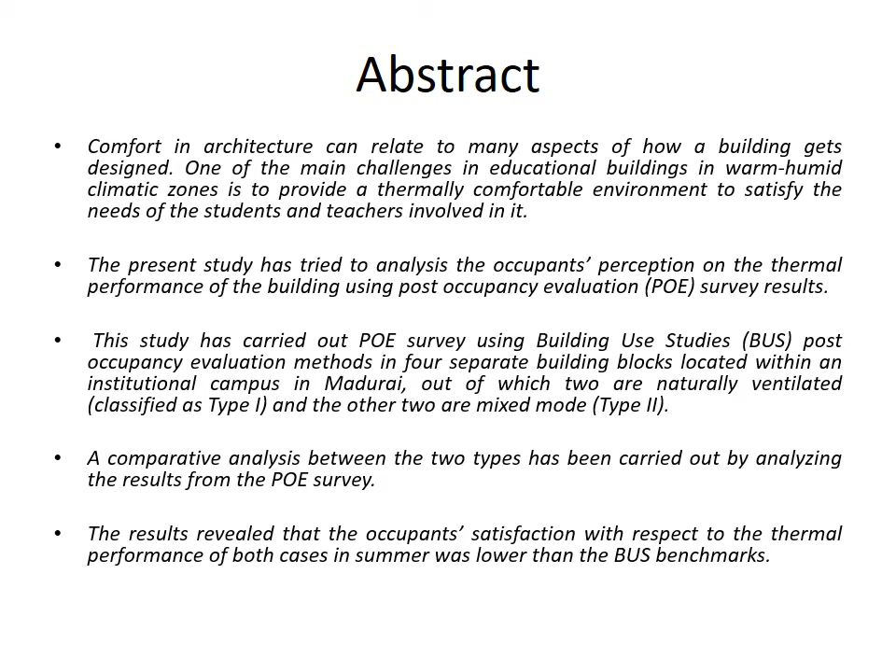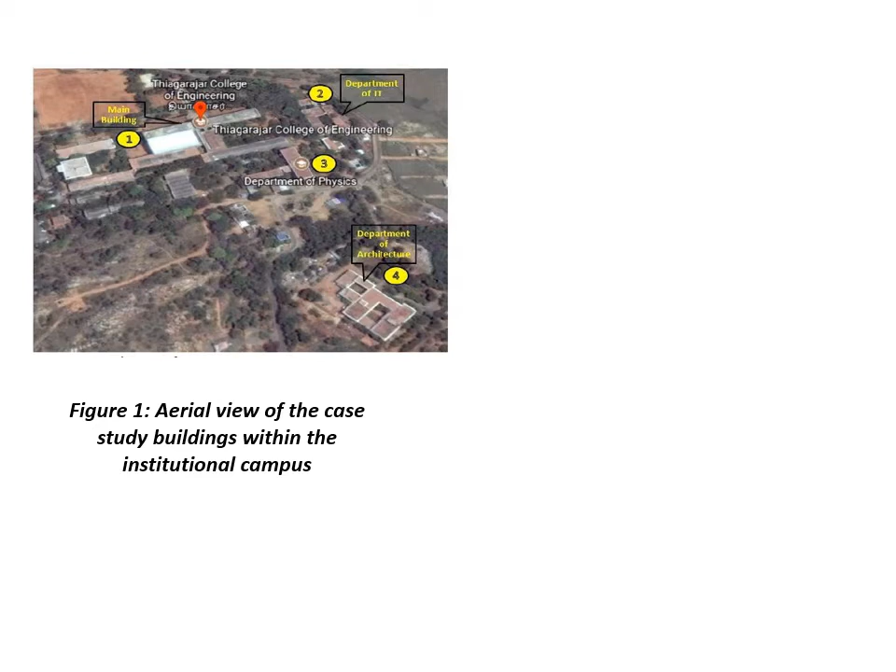The BUS survey methodology. A total of 600 surveys, 150 to each block, were distributed, but only 210 occupants responded back, 110 from type 1 blocks and 100 from type 2 blocks in the year 2016. The respondents were faculty members and undergraduate students of age group 18 to 55, 40% male and 60% females.

Figure 3 represents the results of one of the variables derived from the BUS questionnaire survey. The benchmarks are denoted by 3 vertical lines on the top scale, and the scale midpoint is denoted by 3 vertical lines at the bottom scale of each variable.

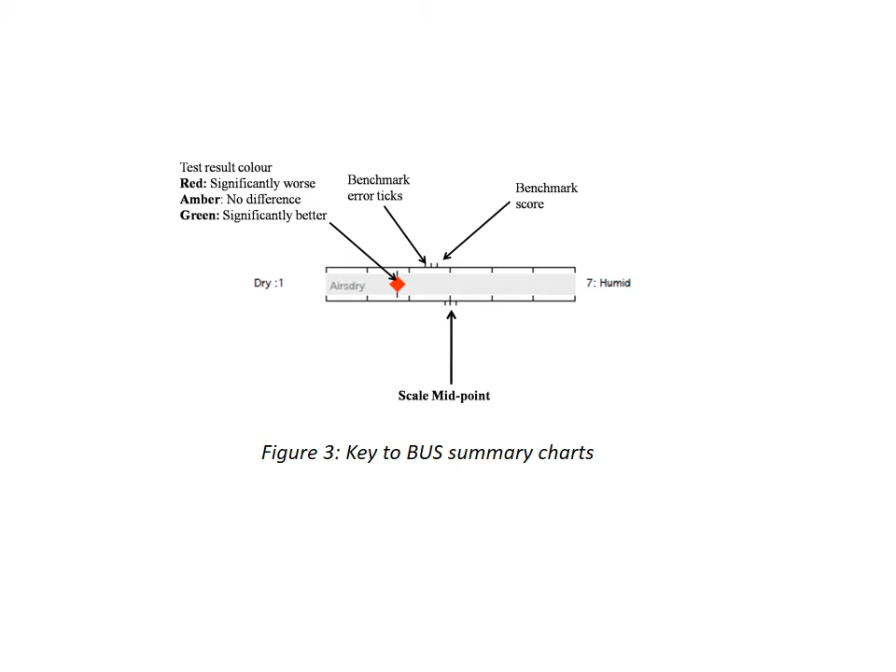The test results are denoted by 3 colors, the green, amber and the red, where green squares show the mean values are higher than the benchmark and scale midpoint and hence in good agreement. The amber circles represent no difference and the red diamonds show a poor score.

Figures 4 and 5 represent a summary of the overall performance ratings of the 12 variables surveyed using the BUS questionnaire survey in type 1 and type 2 buildings respectively. From the results, it is evident that the variables with mean scores higher than the benchmark levels are denoted by green squares, showing that the occupants feel significantly better. The amber circles are closer to the benchmark and slightly higher than the scale midpoint, representing no difference in the occupant sensation. The red diamonds denote significantly worse sensations.

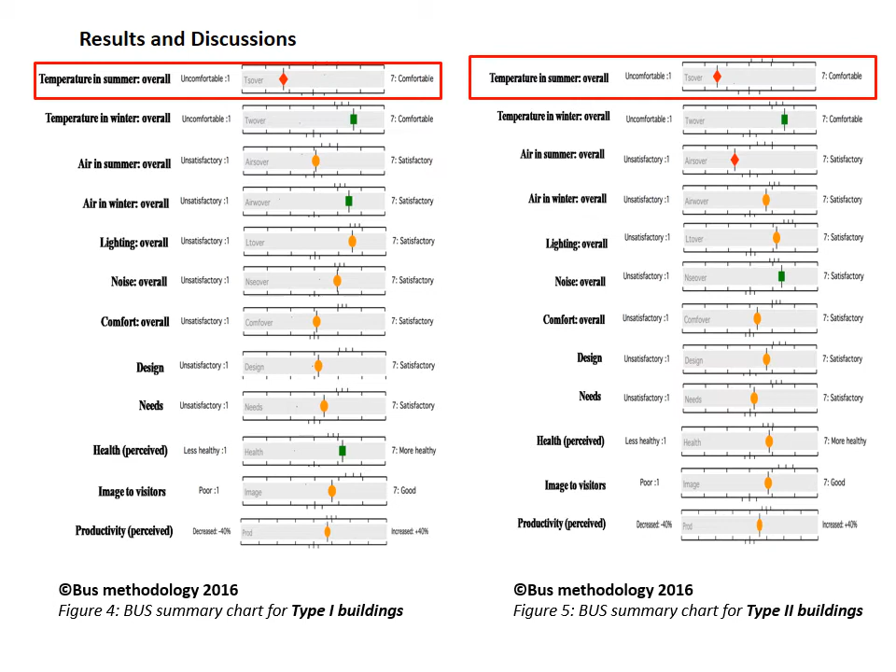In both type 1 and type 2 case study buildings, it is observed that the overall temperature in summer was significantly worse and marked by red diamonds. In type 2 buildings, it was observed that the overall air in summer was also lower than the benchmarks and the midpoint limits.

Figures 6a and 6b show the BUS scores for temperature overall and air overall in summer for type 1 and type 2 buildings. It is noted that 68% of the occupants were dissatisfied with the temperature overall in type 1 buildings in summer, and 80% of the occupants in type 2 buildings were dissatisfied with the temperature in summer.

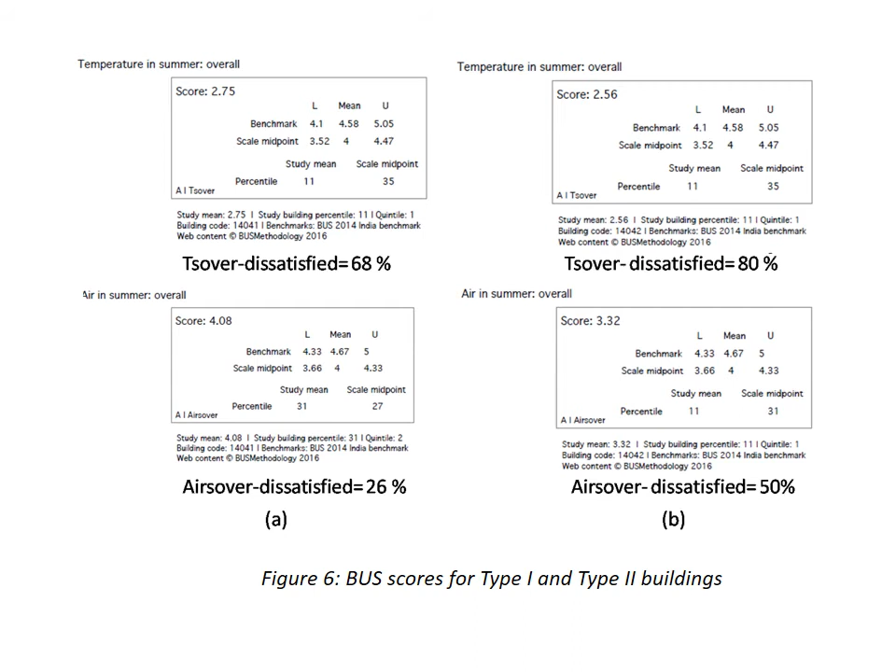The overall ratings of air in summer in naturally ventilated classrooms of type 1 buildings are lower than the benchmark, and the results showed that 26% of the occupants were dissatisfied, whereas in type 2 buildings the percentage of occupant dissatisfaction was higher compared to type 1 buildings. The subjective measurements of thermal comfort revealed that the occupants in naturally ventilated buildings had higher acceptability levels than the occupants in air conditioned buildings. The students were not able to concentrate on classes.

Building design implications. Based on the observations on the building design of the case study buildings, it could be inferred that the orientation of the buildings, presence of courtyards, thermophysical properties of the building envelope, window to wall ratio, and shading devices might have an influence on the thermal performance of the building.

It was identified from the responses that the occupants in NV classrooms that were enclosed around courtyards with aspect ratios 1:1 or 1:2, or had cross ventilation with windows oriented towards north and south, and windows with proper shading, felt thermally comfortable, whereas occupants in NV classrooms that had windows on one side only, windows oriented towards east or west, higher WWR, or windows with no shading devices felt thermally uncomfortable.

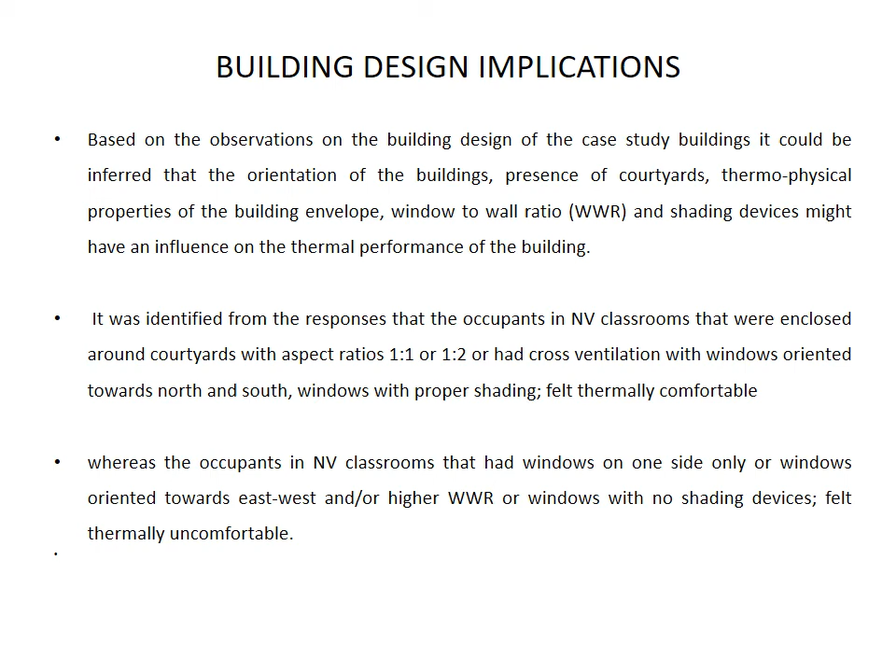Since the POE results showed that the occupants were dissatisfied with the temperature and air in summer, it was decided to conduct a field study of the outdoor and indoor thermal environment of the learning spaces to identify the building design implications on thermal comfort. Thus, the BUS POE results act as an effective database which can be used by architects for further investigation and development of research ideas for the efficient design of naturally ventilated educational buildings in warm, humid climatic regions.